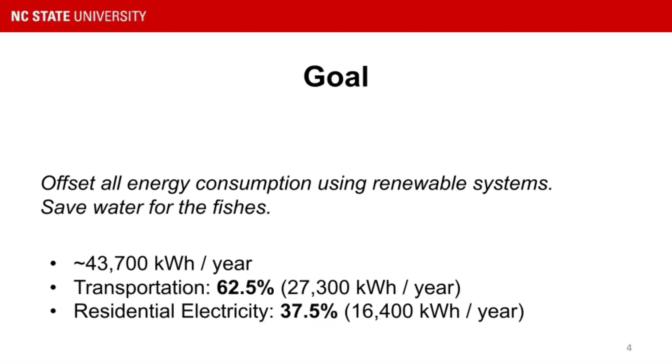Our goal is to offset 100% of the total annual energy consumption using renewable energy systems. The total demand is approximately 43,700 kilowatt hours per year. Out of this, about 62.5% comes from transportation, which is around 27,300 kilowatt hours annually. And the remaining 37.5%, or about 16,400 kilowatt hours, comes from residential electricity use. This breakdown is important because it guides how we design our system to meet both electricity and fuel needs.

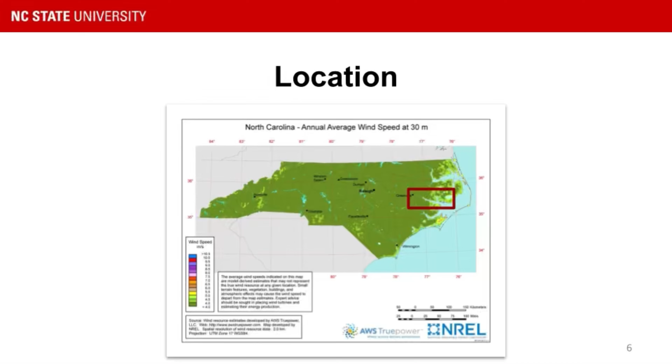Now, when looking at our selected site, this first map shows us the annual average wind speeds in North Carolina with a red box indicating where our site is located. The selected site is located at 1528 South King Street in Windsor, North Carolina, in Bertie County. The property is about 59.65 acres, consisting of roughly 20 acres of farmland and 40 acres of wooded land.

Looking at our justification, this property is well suited for a renewable energy system because of its mix of open farmland and wooded areas. The 20 acres of flat farmland can be used for system components, while the wooded land provides flexibility for future development. The site is also adjacent to a small subdivision and a pond, which adds potential advantages for placement and expansion.

Another key advantage is room for growth. Windsor is a small town with a population of around 4,000 people, which creates the potential to expand this project into a community scale renewable energy system.

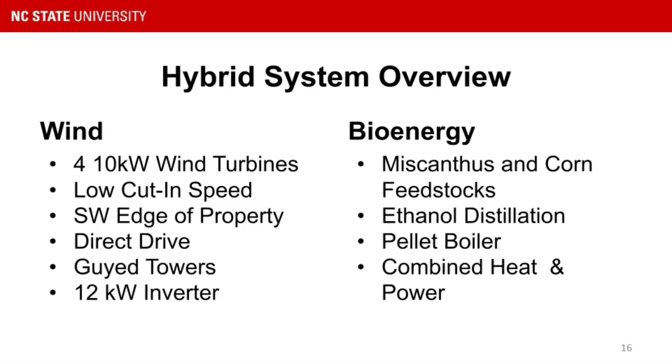For our bioenergy portion, the system uses corn and miscanthus as our feedstocks. Corn is used for ethanol production, which will offset the transportation energy, while miscanthus is used in a pellet boiler for supplemental heat and power.

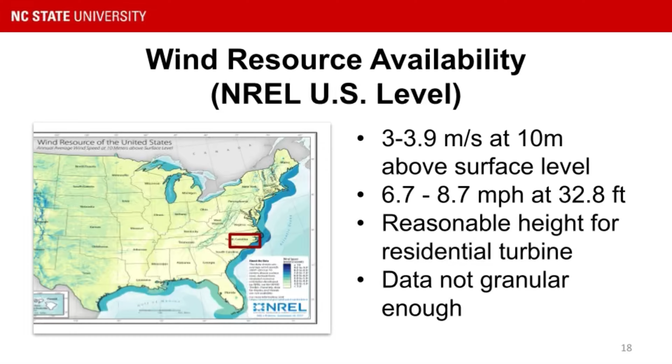Moving into the wind resource data, we first looked at the NREL wind maps, which show wind speeds of about 3 to about 3.9 meters per second at the lower heights. That's not very strong, but it is still perfectly usable for our smaller wind system. We also compared this regional weather data, which showed average wind speeds of around 7.4 miles per hour annually, with higher speeds during the peak months. But one issue here is that the data isn't super precise for our exact site, so it's a little rough.

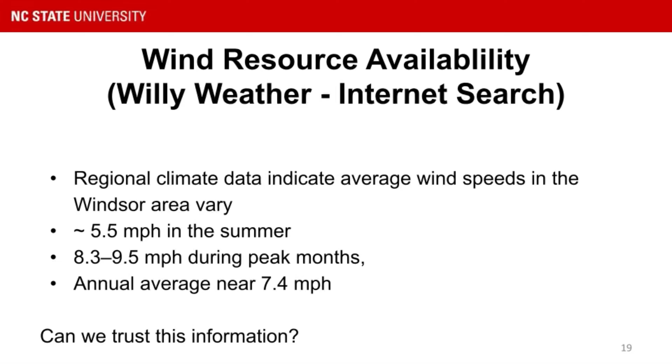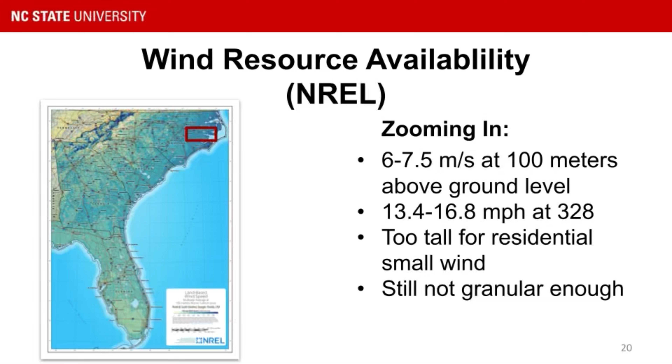So to get a better understanding, we looked at wind speeds at higher elevations, specifically around 100 meters. The speeds would increase to about 6 to about 7.5 meters per second, which shows how important turbine height is. We also analyzed wind rose data from nearby locations, like Plymouth and Washington, North Carolina. This showed that wind mainly comes from the southwest, which helps us decide where to place the turbines for maximum efficiency.

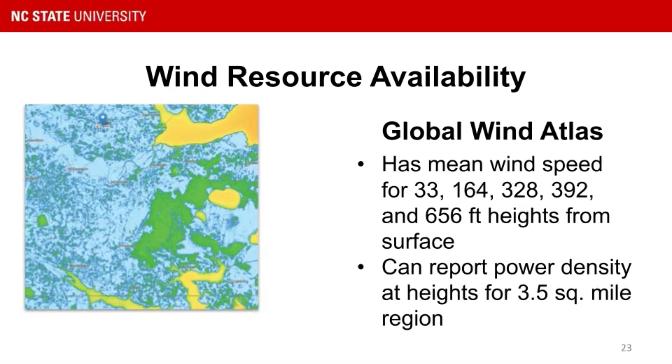Finally, we used data from the Global Wind Atlas to help model our wind speed changes. To turn all this information into a useful tool, we utilize the Global Wind Atlas to extract specific mean wind speeds at 5 distinct elevations. While the Global Wind Atlas provides these discrete data points for a 3.5 square mile region, effective turbine placement requires a continuous model to estimate wind speeds at any potential hub height.

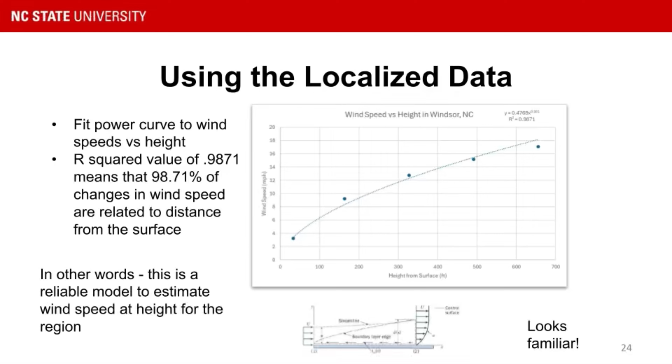As shown in the lower diagram, this profile mirrors the standard atmospheric boundary layer behavior we observe in fluid mechanics. The velocity increases as we move away from the surface and escape the effects of ground-level friction and obstacles. By establishing this curve, we can now accurately project energy yields for various turbine specifications within the Windsor area.

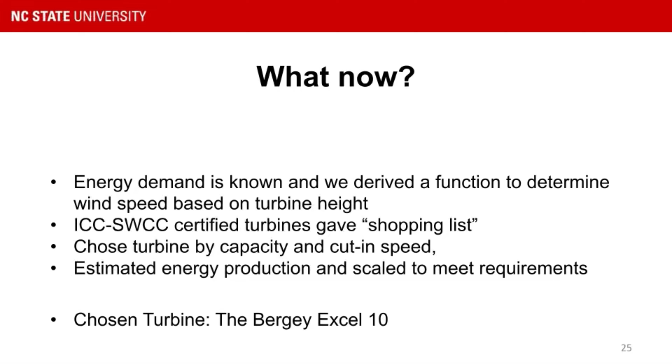Since we already knew our energy demand, and we derived a function to determine wind speed based on turbine height, we were able to use the Small Wind Certification Council's list of certified turbines and choose one according to capacity and cut-in speed. From there, we could estimate energy production and scale it to meet our requirements. The turbine we chose is the Bergey Excel 10.

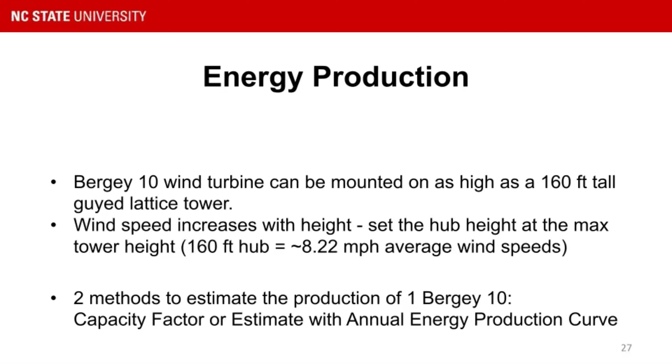Since wind speed increases with height, we set our hub height at the maximum tower height, which we calculated to provide 8.2 miles per hour average wind speed in this area. From here, we have two methods to estimate the annual production of one Bergey turbine. Either apply the capacity factor to the nameplate capacity, or estimate using the annual energy production curve.

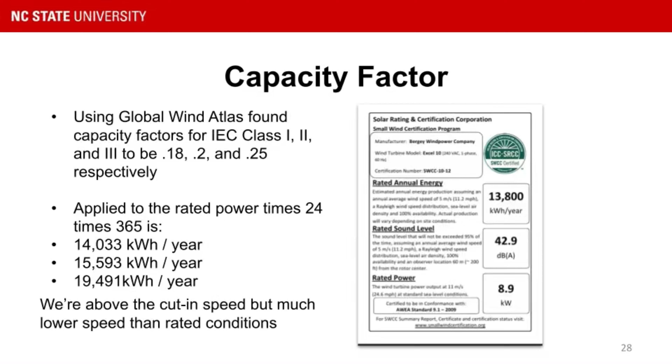Using Global Wind Atlas, we found capacity factors for IEC classes 1 through 3 to be 0.18, 0.2, and 0.25 respectively. If we applied these capacity factors to the rated power times 24 hours in a day times 365 days in a year, we have these estimated annual productions. We know that we're above the cut-in speed, but we're much lower than rated conditions, so let's try using the annual energy production curve. It turns out we were right to be skeptical of applying the capacity factor to the nameplate capacity of the turbine.

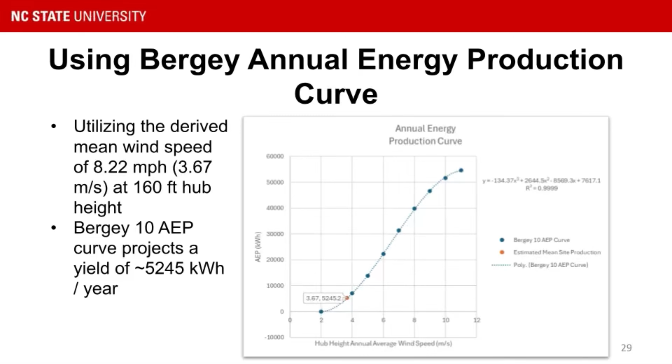Utilizing the derived mean wind speed of 8.2 miles per hour at 160-foot hub height, the Bergey 10 annual energy production curve projects a yield of around 5,000 kilowatt hours per year. Knowing that our residential energy demand is around 16,500 kilowatt hours per year, and we estimate production to be 5,245 kilowatt hours a year, we'll need 4 turbines. This excess production yields 4,480 kilowatt hours per year, and our estimate aligns with the manufacturer's brochure, which claims 4,910 kilowatt hours per year at 8 mile per hour wind speeds.

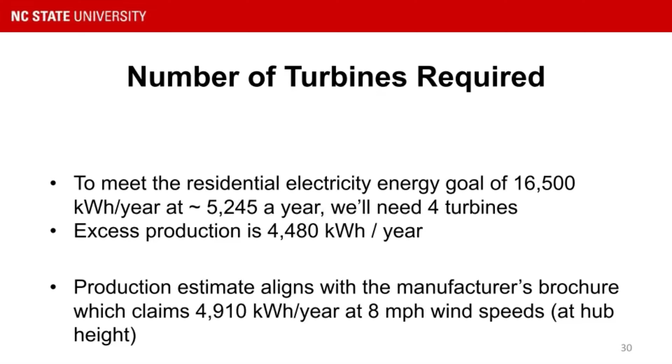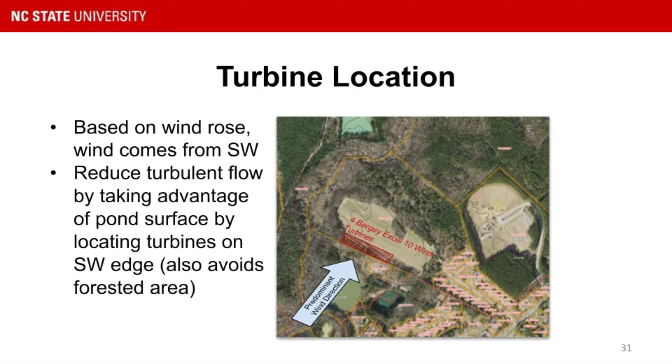Based on multiple wind rose charts from around the area, the wind blows predominantly from the southwest direction. One great thing about this site is that the line of trees is thin, and there's a pond situated to the southwest property line. If we install our 4 Bergey 10 turbines here, we'll take advantage of the reduced turbulent flow over the pond surface and potentially see higher wind speeds than estimated. Now we're going to move into the bioenergy component of our hybrid system.

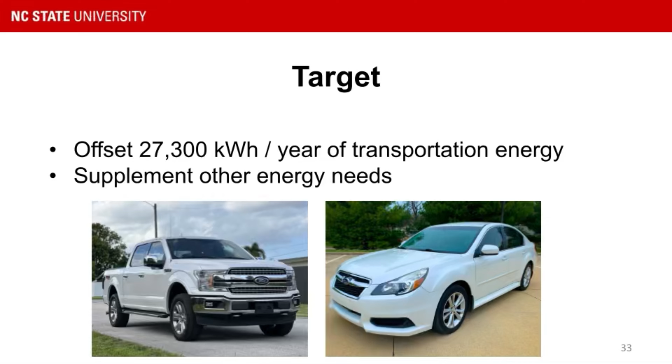We have 2 primary targets for the bioenergy component of our system. One is to offset 27,300 kilowatt hours per year of transportation energy, and the other is to supplement our other energy production. To do this, we'll use 2 different feedstocks, miscanthus for combustion and corn for ethanol production.

1 acre of miscanthus provides 15 dry tons per year. This can be used with either a gasifier or pellet boiler. Our intention is for this to supplement residential demand and open the potential for combined heat and power applications.

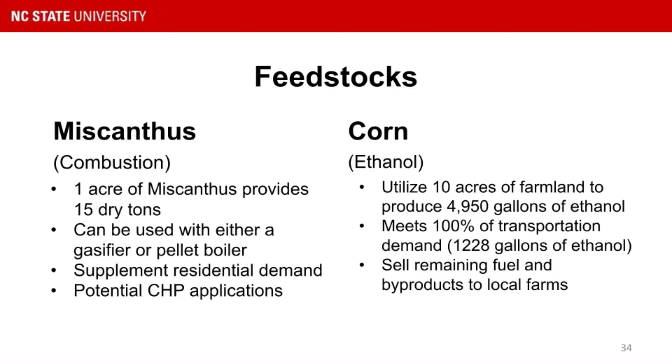The other feedstock, corn, will utilize 10 acres of farmland to produce 4,950 gallons of ethanol. This meets 100% of the transportation demand and allows the sale of remaining fuel and byproducts of production to local farms. You may have noticed our initial proposal only uses 13.5 of the 20 available farmland acres.

The remaining farmland can be contracted to local farmers or planted for cash crops. Think things like soybeans, corn, cotton, and tobacco. This still leaves 40 wooded acres remaining untouched for biodiversity, recreation, and building a new home. The remaining plots of land can be subdivided and sold if you feel like it's an excess amount.

To implement this plan effectively, there are some processing requirements. First, we'll need a small-scale distillation unit to convert corn grain into fuel. We'll need a pellet press to process the miscanthus into usable fuel for a biomass boiler, which can be used for supplemental residential heat and power.

We're avoiding gasification because it could add complexity and cost to the system. And to take advantage of some incentives, we'll need to transition from residential use only to small-scale business applications.

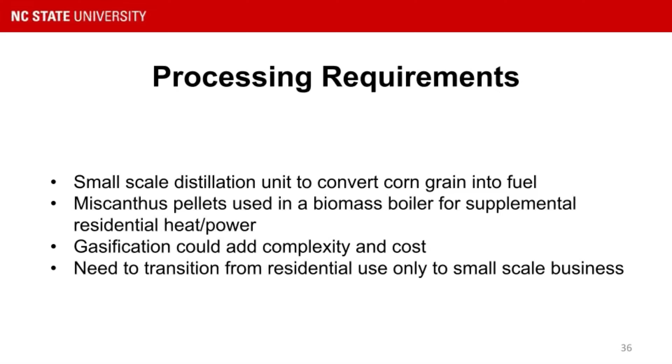Looking at costs, our cost breakdown consists of land, the new home, 4 wind turbines, the biomass pellet boiler, ethanol distillery, and the 2 flex fuel conversion kits for both vehicles.

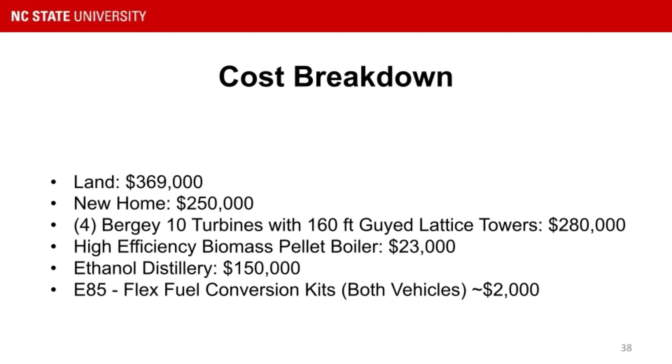Looking at the cost summary, relocation-wise, we're investing $619,000 into land and building a house. And we are investing $455,000 for the renewable energy hybrid systems. This equates to over $1 million US.

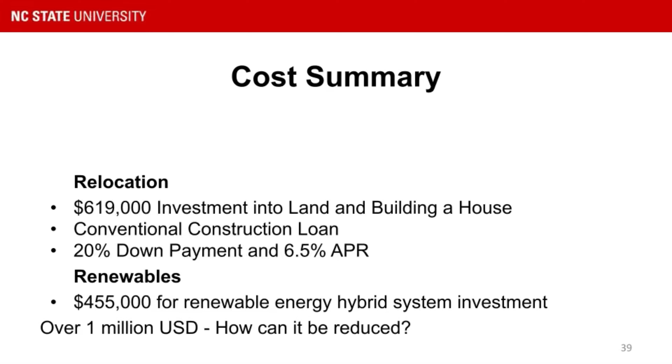For our final cost assessment, our old energy cost was $6,970 a year, with a payback period of 32.5 years using only savings. By selling excess ethanol, we would make $14,423 in profit. And by selling the excess electricity to the grid, we'd be making about $670, with a total profit of $15,093, with plenty of room to grow.

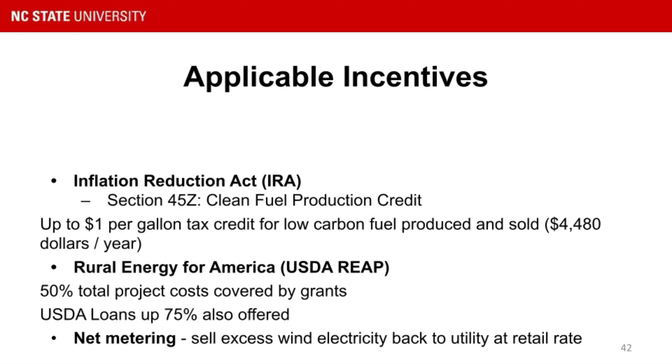Now looking at incentives, some applicable incentives are the Inflation Reduction Act, which allows for up to $1 per gallon tax credit for low carbon fuel produced and sold. The Rural Energy for America incentive, that would cover 50% of total project costs by grants, as well as USDA loans being offered. Lastly, net metering would allow us to sell excess wind electricity back to utility at a retail rate.

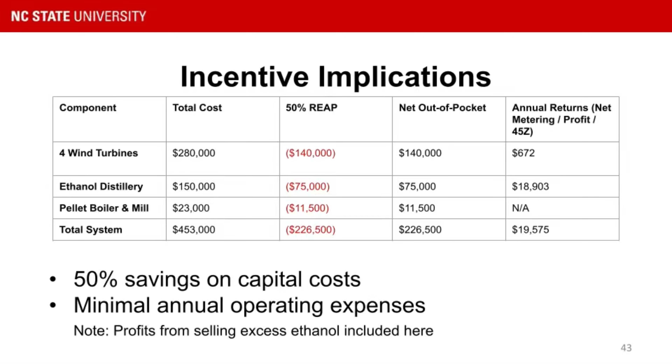Looking at these incentives applied in regards to the 4 wind turbines, the ethanol distillery, the pellet boiler and mill, and the total system altogether, we have 50% savings on capital costs, minimum annual operating expenses, and also take note that in this data, profits from selling excess ethanol are included.

One missed opportunity is the Inflation Reduction Act, which would have provided a 30% uncapped tax credit on purchase and installation of wind turbines, battery storage, and biomass boilers, but unfortunately it was terminated at the end of 2025.

In conclusion, some limitations include the unknown equipment cost and market volatility that makes capital costs harder to predict. The agricultural operating costs were not considered in this project. The project assignment was not constrained by a budget, and the payback period is likely to be the best case scenario, as the ethanol system may break even or even lose money in worse years.

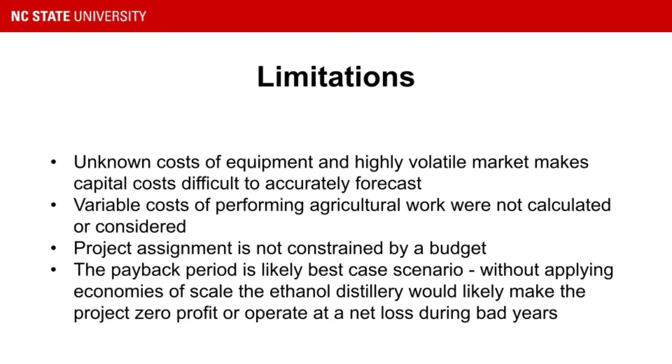Our net zero goal was accomplished. Although initial investment is high, transitioning to make profit from the land is very beneficial, as we produced substantially more energy than what was being used. And incentives significantly shortened this payback, as we have $6,970 in savings per year, plus $19,575 in profit and incentives, which brings the payback period back to 11.6 years.